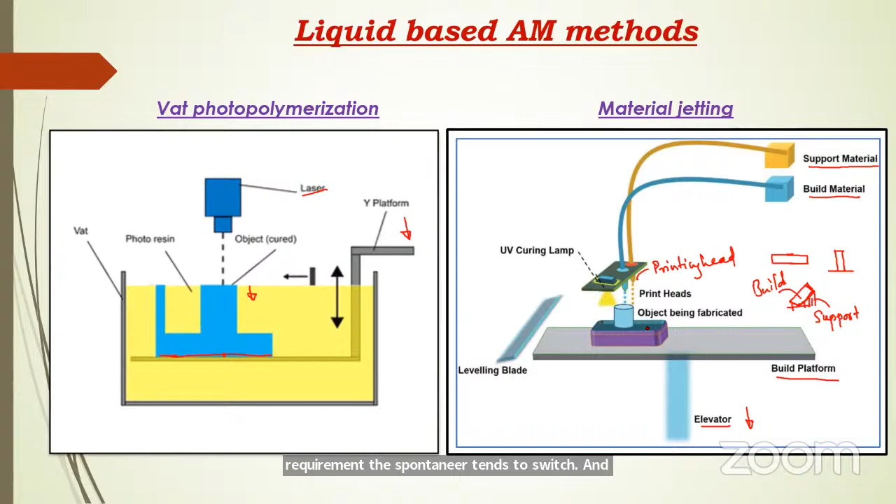So for this we have two types of heads. One supplies the support material, and the other supplies the build material. Both materials are sent through what we call the printing head, and depending upon the requirement, the printing head switches and supplies the build material as well as the support material, and the object is cured. This is material jetting.

Another process is photopolymerization. This is where liquid polymers that react to UV radiation tend to cure and form a solid. This reaction is called photopolymerization, and the material used is called photopolymers. It is mainly used in coating as well as printing industries.

Stereolithography was the first type of photopolymerization process, built by Charles Hull.

Now we talk about how the liquid is converted into solid. You can see monomers here, and photoinitiators in the photopolymer resin. When these monomers and photoinitiators are subjected to UV light, free radicals are formed, which initiate a chain reaction between the monomers and photoinitiator. The chain propagates further due to continuous supply of UV light, and terminates when all the monomers and photopolymers are chained, thus creating a solid part. This is the chemical process that happens behind photopolymerization.

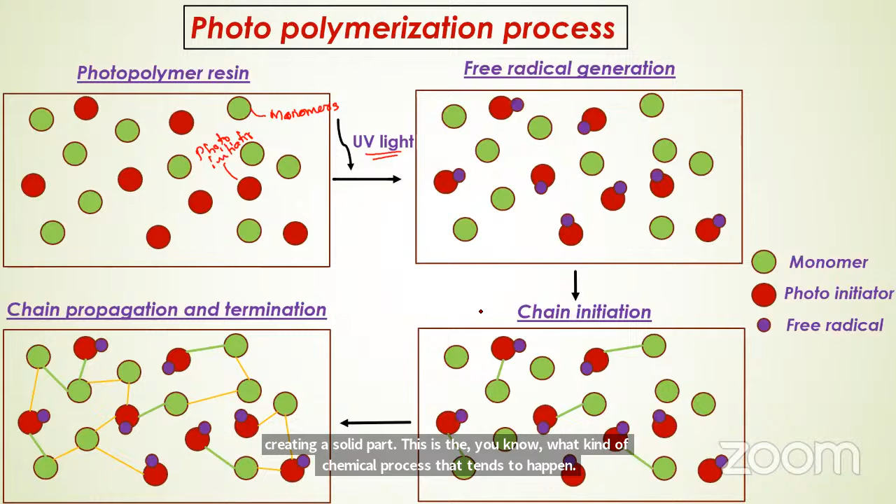On average, for every 2 photons created by the UV laser, 1 radical is produced, and that radical can polymerize over 1000 monomers. Once all chain initiation completes, the polymerization process terminates by three types of processes: recombination, disproportionation, and occlusion. Recombination occurs when 2 polymer chains merge by 2 radicals. A single radical is enough to polymerize over 1000 monomers, and when 2 radicals come into contact, the polymerization process terminates.

Another process is disproportionation. This involves cancellation of one radical by another without joining, and occlusion occurs due to limited momentum. When there is no free flow of this radical, the polymerization process automatically terminates.

Now, looking at the subsystems of liquid additive manufacturing, what components do we use? One is the scanning system. Another is the shape of the UV light used to cure the photopolymer resin. Another is the shape of the liquid used for this particular process.

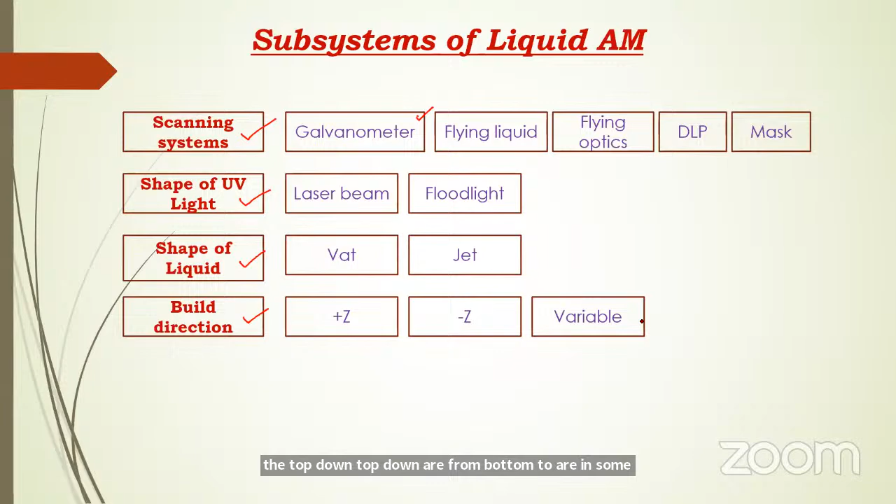If you go for the shape of the UV light, what we use is either a single point laser beam or floodlight. The shape of liquid used in liquid additive manufacturing is either vat or jet. Vat is a single droplet, whereas jet is a continuous droplet over multiple nozzles. The build direction can be top down, bottom to up, or in some cases, if necessary, a variable build direction.

In the galvanometer scanning system, the laser is pointed over a mirror. Depending on the design, the mirror may change its orientation, so the laser beam gets deflected from these mirrors and is pointed through a lens called the F-theta focusing lens. When this pointer falls over the photopolymer resin, it cures the resin. The whole arrangement is called the marking head. Here a single mirror is shown, but the galvanometer consists of many mirrors. This is the process happening in galvanometer scanning.

Now, for flying liquid scanning: there is an XYZ table that can move in all 3 directions. The laser source is placed above and remains constant, it does not move, whereas the XY table moves over the surface. This is what we call the flying liquid scanning system.

Another type is the flying optic scanning system. This is similar to the flying liquid system, but here the XYZ table remains constant with no movement in the Z direction of the build platform, whereas the laser optic moves in the Z direction. That is the main difference between flying optics and flying liquid in liquid additive manufacturing systems.

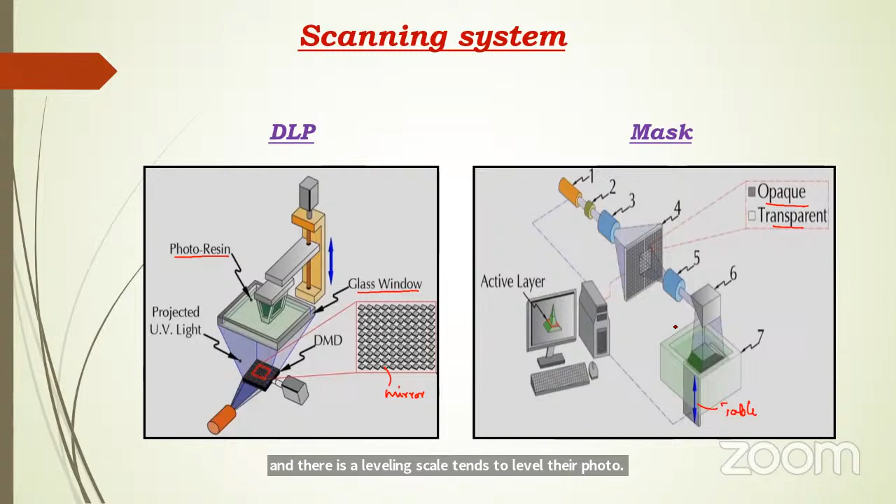Once the layer is built, the table moves down, allowing the photopolymer resin to flow over the cured area, and a leveling blade levels the photopolymer resin over this cured area. Thus the component is formed in liquid additive manufacturing, in the case of DLP and masking systems.

So if you talk about the shape of the UV light used, two types of light are used: one is laser beam, another is floodlight, depending on the nanometer or micrometer scale being used. In the case of laser beam, a single point cures a particular spot, whereas floodlight supplies a beam of light over the surface of the photoresin to cure it. And for the shape of the liquid used, one is vat, another is jetting.

You can see the vat is filled over a particular tub, and the laser is pointed over the required area, and the photopolymer resin is cured, and the object is formed. In case of jet printing, there are multiple nozzles, and we can go for different colors through these nozzles. It tends to go like a shower and fill that particular area. Again, the laser beam, or floodlight, is passed over this photopolymer resin, and it is cured in case of jetting.

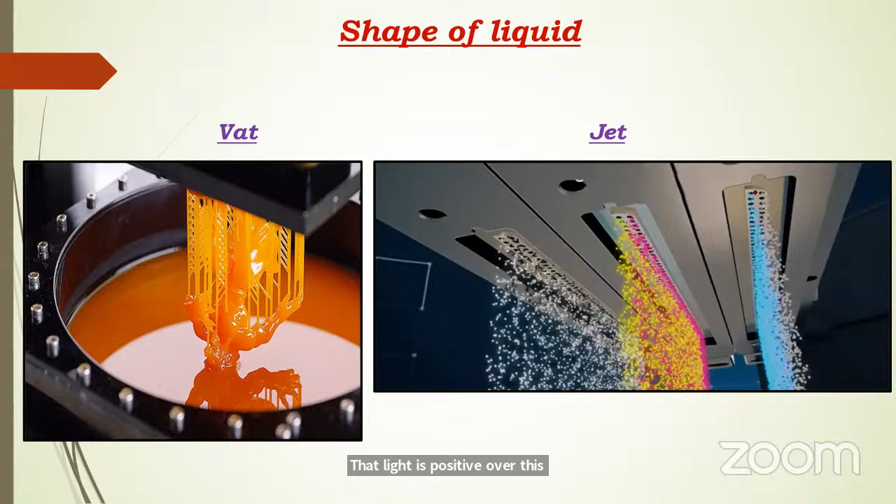So we talk about SLA, DLP, and LCD. What is the difference between SLA, DLP, and LCD? This is also known as resin 3D printing. There are three main 3D printing technologies: SLA, DLP, and LCD. All three use a light source. In stereolithography, we use UV lasers as a light source to selectively cure the photopolymer resin. In digital light processing, we use a digital projector, where the UV light source cures a complete layer of resin at once. In liquid crystal display printing, we use an LCD display module to project a specific light pattern over the resin area, and it cures.

Now we can watch a small video regarding the difference between SLA, DLP, and LCD printing. I will share this.

Just a minute. Just a minute, sir, I'll share it. I can't go to look for it.

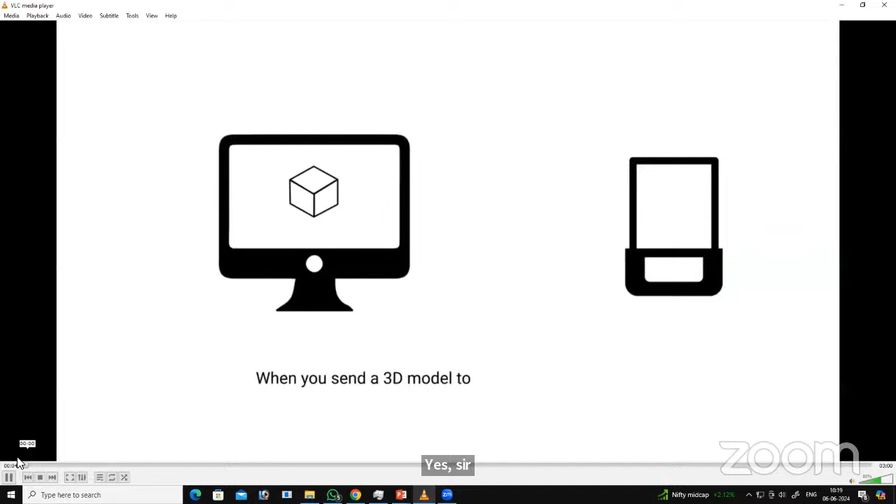DLP, laser, and LCD are the three main technologies used for desktop 3D printing. Are you able to use the audio, sir? Yeah, yes, sir, perfect, sir.

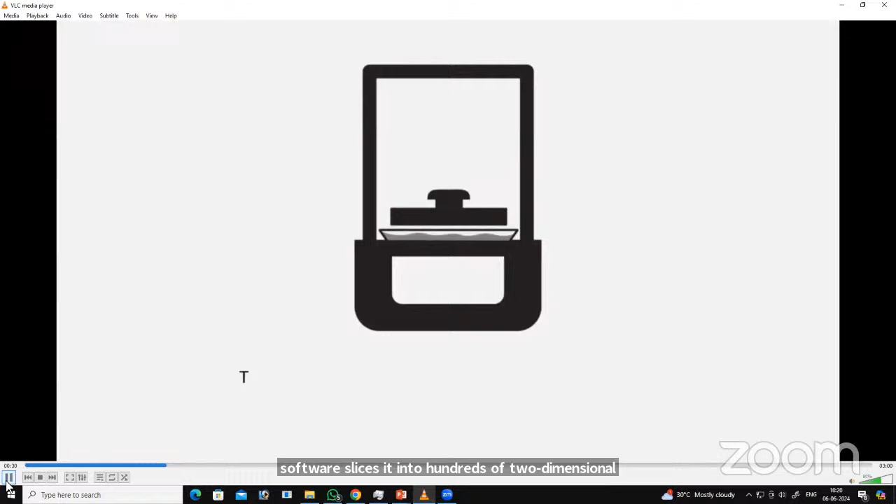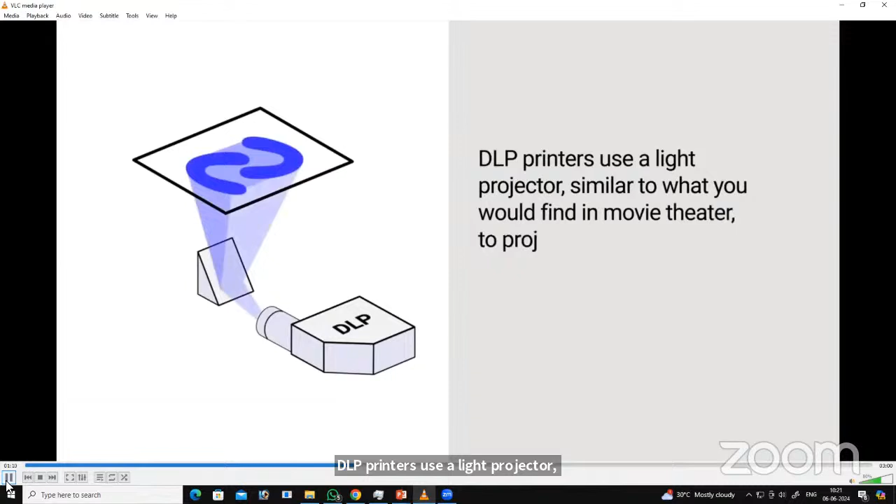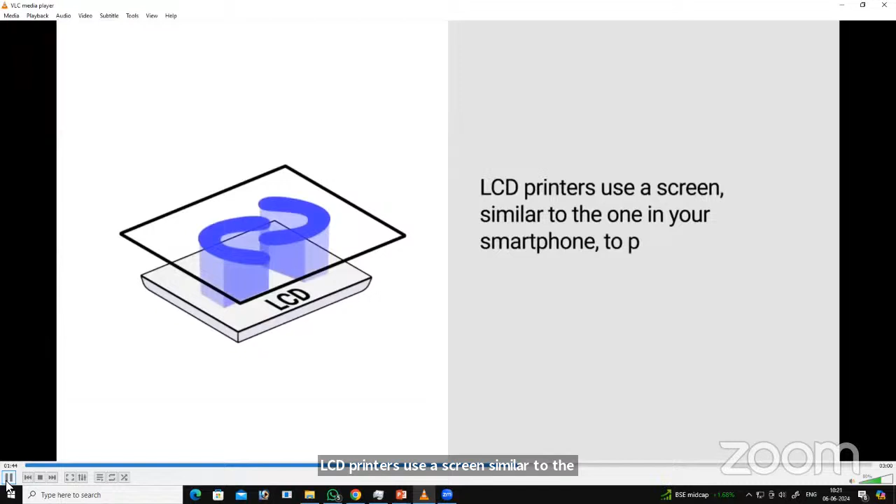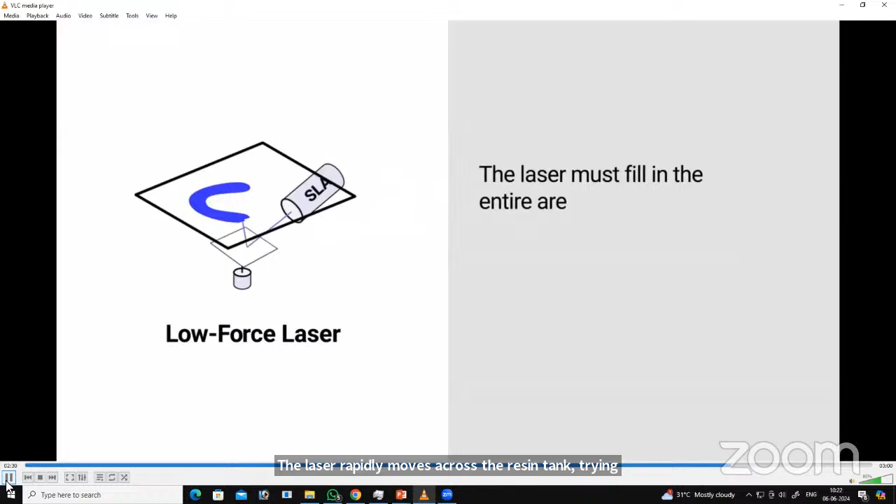In dentistry, to understand how they work, we need to know something about how 3D printers see 3D models. When you send a 3D model to your printer, the software slices it into hundreds of two-dimensional layers. Your printer sees a print as hundreds or thousands of image layers that it will print one on top of the other until the model is complete. The chemistry of 3D printing resins means each printed layer sticks to the build platform but not to the resin tank. Once a layer is complete, the build platform lifts slightly and a new layer is drawn atop the previous one. This process repeats until the model is completely built. Although DLP, laser, and LCD all follow the same basic process, they differ in how they deliver light to the photopolymer resin, and this divergence makes all the difference. Let's take a closer look. DLP printers use a light projector, similar to one in a movie theater, to project the image of an entire layer simultaneously, regardless of the number of parts. Because they cure a full layer in a single flash, DLP printers can be outstandingly fast. They are also very reliable, with low complexity and no moving parts. SprintRay Pro is powered by a DLP projector of our own design, enabling it to 3D print models quickly and with outstanding accuracy. LCD printers use a screen, similar to one on a smartphone, to project the image of an entire layer at once. In this way, LCD printers are quite similar to DLP; they can even share materials. But LCD panels have a few key drawbacks: the light used to cure resin is damaging to the organic compounds in LCD screens, so most LCD printers treat their light source as a consumable, requiring frequent, costly replacement. Laser printers use a pin dot of high-intensity light to draw each layer, similar to using a fine-tipped pencil to draw on paper. The laser rapidly moves across the resin tank, drawing the details of each layer as it goes. It must fill in the entire area with a pin dot of light, which limits the printer's speed, especially when printing multiple parts at once. DLP, laser, and LCD printers are all used in dentistry, but the speed, simplicity, and durability of DLP has made it the first choice of dental professionals all over the world.

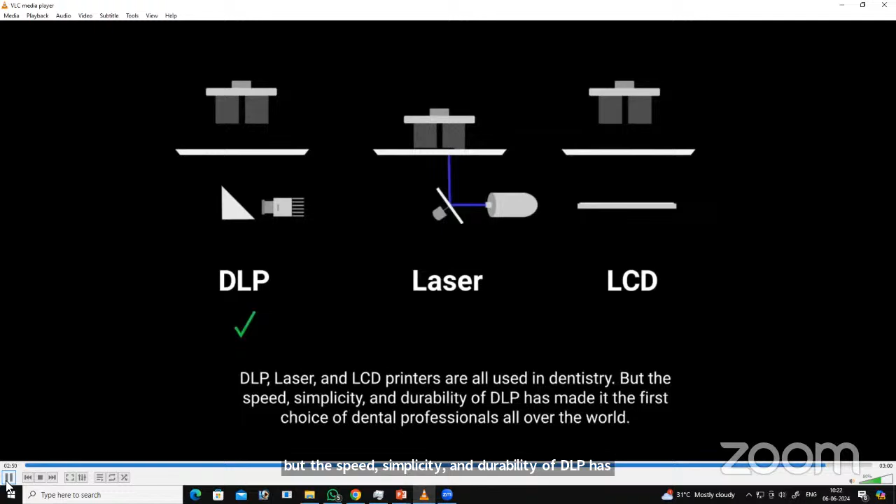So this is the main difference between SLA, DLP, as well as LCD. In case of faster curing, we go for DLP, whereas in case of accuracy, we go for stereolithography.

So we talk about stereolithography - writing with light. It was patented in 1986 by Hull, and it was the first 3D printing technology. It is widely used and most popular in case of resin type printing technology.

This process is very accurate, isotropic, as well as watertight, and the components obtained through this process have a finer surface finish. It creates objects by selectively curing photopolymer resin using a UV laser beam. The material used in SLA is photosensitive thermoset polymer, which comes in liquid form, and when cured, it forms into a solid.

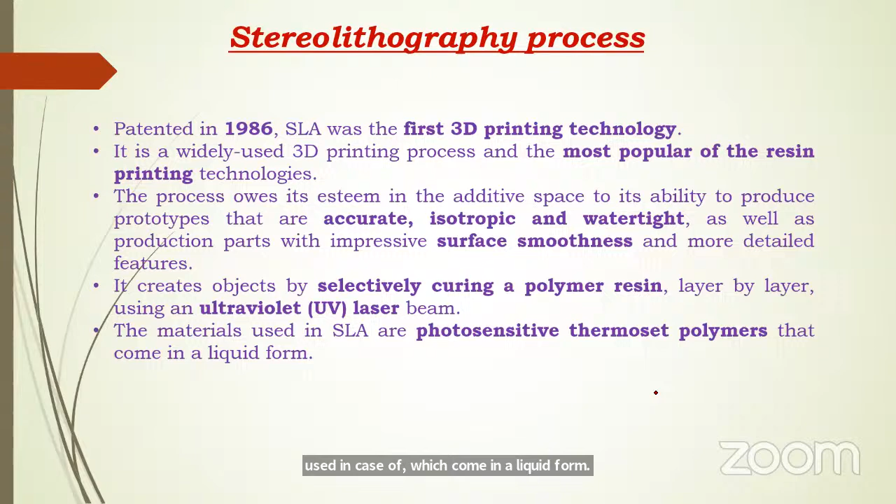So what are all the subsystems in case of SLA? Here SLA tends to use the galvanometer, and the type of light which SLA uses is a laser beam with the wet liquid, and the build direction in case of SLA is negative Z direction.

This diagram shows the stereolithography process. This is what we call the printed part, and this becomes the galvanometer. The light tends to emit from this laser source. This galvanometer has tiny mirrors which direct the laser light to the required area through this XY scanning mirror, which tilts in different directions depending upon the requirement.

There is a leveler which levels this resin over the print platform, and the laser cures the required area. Once it cures the required area, it moves in the Z direction, allowing the resin to flow over the cured part, and the next layer builds. Fine layer thickness can be controlled using this stereolithography process.

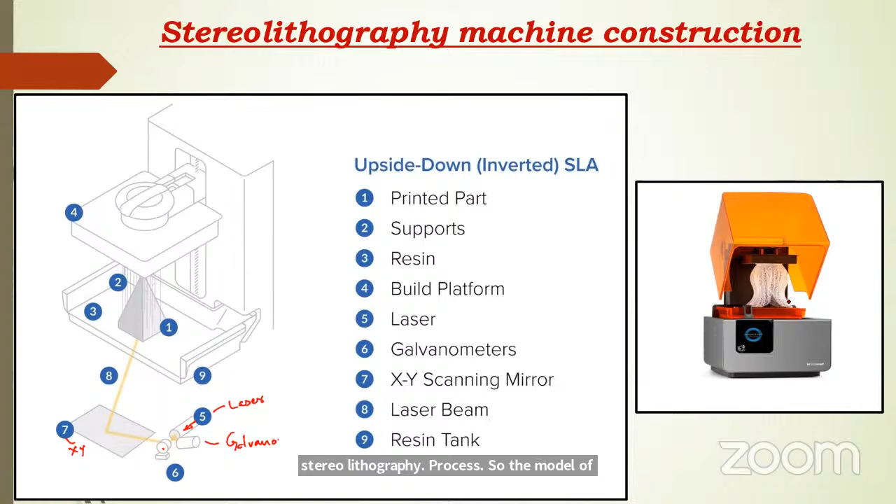So the model of the build material is shown in this diagram. The working principle is very well known - it positions the build platform in the tank of liquid photopolymer depending upon the layer thickness. A UV laser tends to cure the selectively curing area and solidify the photopolymer resin.

The laser beam is focused through tiny mirrors present in the galvanometer. The whole cross-sectional area of the model is scanned so that the produced part is fully solid. This galvanometer moves here and there, and according to that, the part is cured.

During solidification, the monomer carbon chains that compose the liquid resin are activated by means of this UV laser, and the resin becomes solid, creating a strong unbreakable bond between the monomers and the photoinitiators through these radicals. After printing, the part is not in a fully cured state, so it requires further post-processing under UV light if very high mechanical strength is required. The photopolymerization process is irreversible, and there is no way to convert the SLA part back to its liquid form.

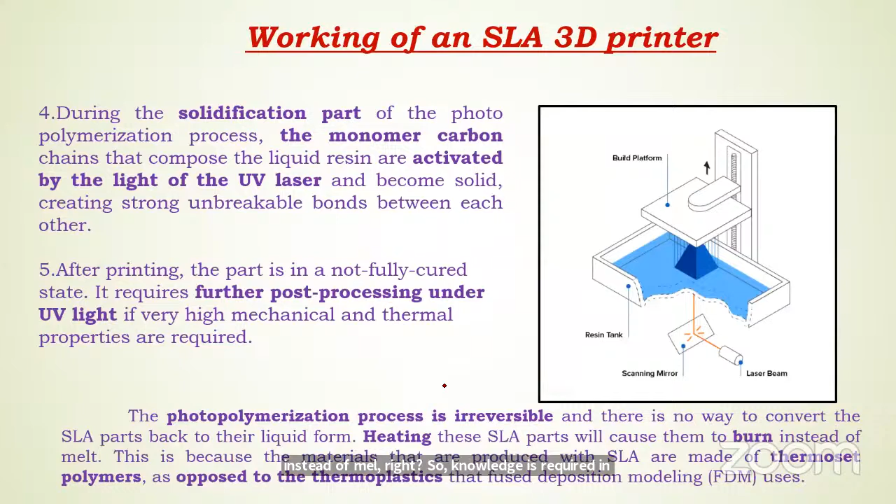Heating these SLA parts will cause them to burn instead of melt, right? So proper post-processing knowledge is required in case of these SLA printed 3D parts.

So the types of SLA are based upon the machine setup. There are two types: top-down printers and bottom-up printers. In top-down printers, the laser source is placed above the tank and the part is built facing upwards. Whereas in bottom-up printers, the laser source is placed under the resin tank, and there is a transparent part under the tank, so the part is built upside down.

So the tank has a transparent bottom with a silicone coating, and this silicone coating lets the light source fall into the resin so that the part is cured. Once the part is cured, it has to be peeled from the build platform - this is what we call the peeling step, a post-processing step.

The bottom-up orientation is mainly used in what we call desktop printers. Formlabs tends to use these types of printers.

Bottom-up SLA printers are easier to manufacture and operate, but their build size is limited. We can't go for large sizes with bottom-up SLA printers because the force applied on the part during the peeling step might cause the print to fail.

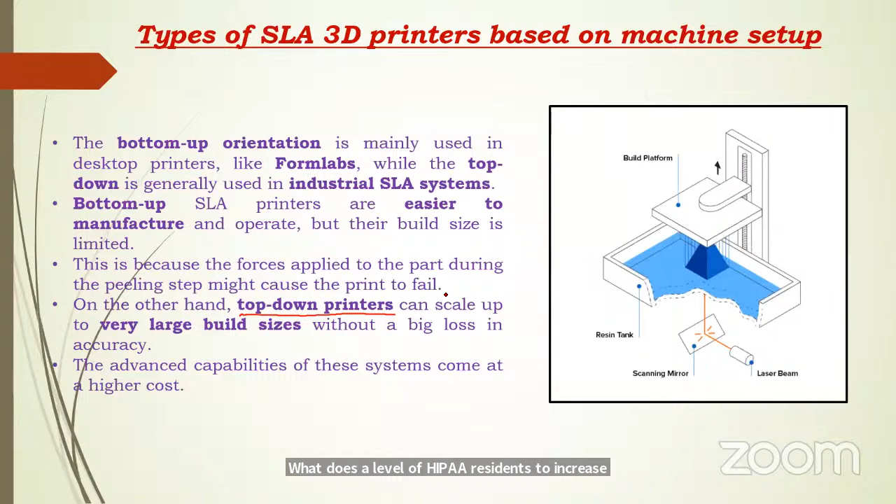The advanced capabilities of these systems come at a higher cost. Once the level of accuracy tends to increase, automatically the cost of the machine also tends to increase. So we can compare the advantages.

In case of bottom-up, it is lower cost and widely available. But in case of top-down assembly, we can build very large size prototypes with faster build times.

If you go for disadvantages, bottom-up has small build size, small material range, and requires more post-processing because support is provided in case of this bottom-up type.

Whereas in case of top-down, the cost is somewhat higher, and a specialist operator is required. Changing the material involves emptying the old tank and pouring the newer material into it.

Popular SLA printer manufacturers are Formlabs for bottom-up, and 3D Systems for top-down. The build size is given, and typical layer height plays a vital role: we can obtain 25 to 100 micrometer layers in bottom-up, whereas 1500 x 750 x 500 build size with 25 to 150 micrometer layers can be obtained in top-down assembly.

High accuracy can be obtained in case of top-down assembly, up to plus or minus 0.1% of the layer thickness.

Regarding materials, in SLA we use liquid resins, which can be chosen based upon the end use of the part. According to the usage, we can select the resins. The price of the resin tends to vary from $50 per liter to $400 per liter, depending upon the quality of the material. Industrial systems offer a wider range of materials than desktop SLA printers.

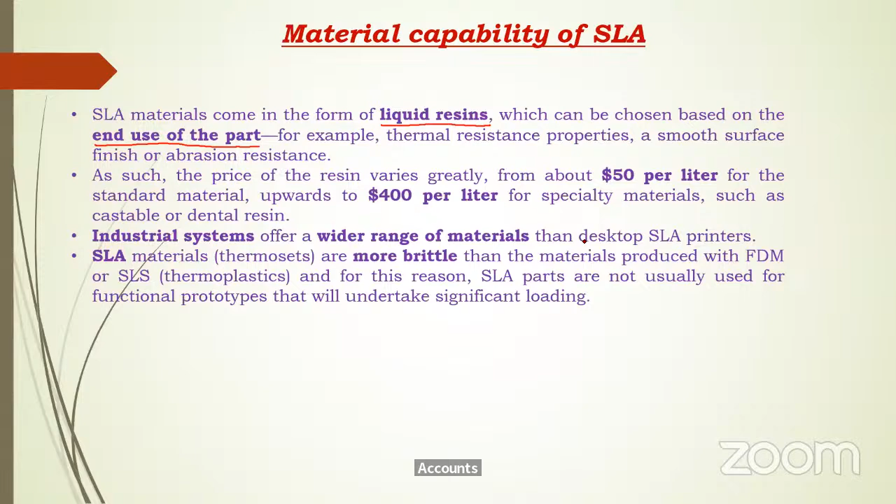Some common materials used in SLA are standard resins, high detail resin, clear resin, castable resin, tough or durable resin, high temperature resin, dental resin, and flexible resin. The characteristics of these resins are given here.

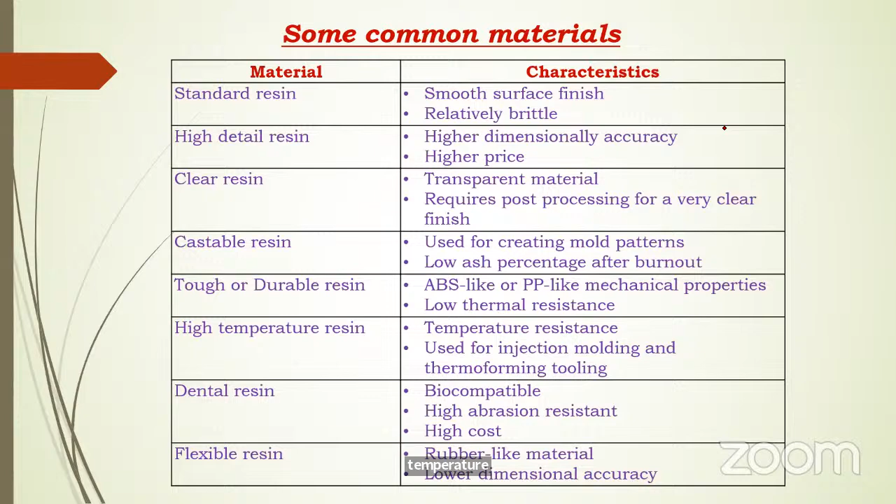What are the printing parameters to be considered in SLA 3D printing? First comes the layer height, which is the exact height of each cured layer required. It affects not only the speed of printing but also the quality of curing. The number of layers required to create the object determines the printing speed and time.

The next printing parameter is exposure time: how long the surface is exposed to the laser light or UV light. Light power and curing exposure time play a vital role in the quality of 3D printing. Exposure time is the amount of time the resin is exposed to the laser light or UV curing light. The default is around 6 seconds for most resins.

If you want enough strength, the exposure time is increased. An increase in exposure time helps if the raft won't stick to the build plate — generally, the longer the bottom exposure time, the more tightly the raft will stick. Then we have to go for peeling the component from the build platform.

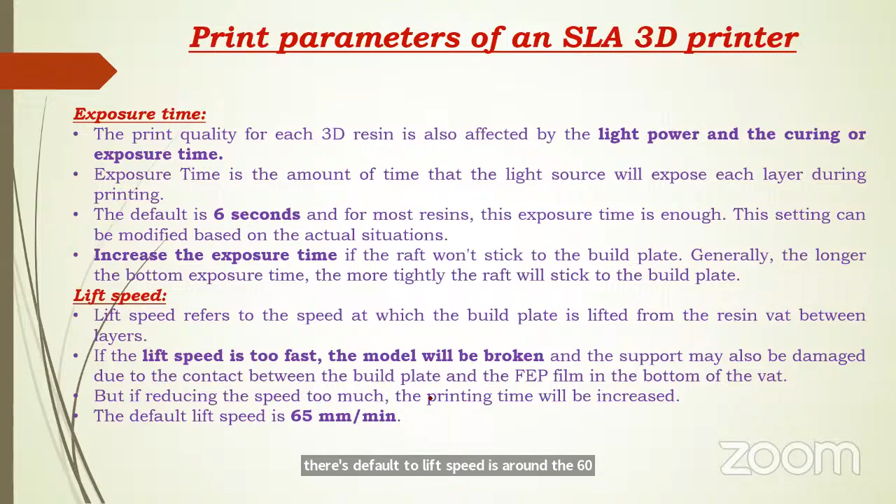Touch points are areas of contact where scaffolding meets the model. Not providing your model with enough support can cause misaligned layers, partially curing resins, and the model to detach from the support. Once it cures thoroughly, this raft tends to cure and stick over the build platform, and removing this plays a vital role. Thin walls fuse to wrap the model, forming a pancake on the bottom of the resin tank. Careful selection of the support structure plays a vital role in case of SLA 3D printer.

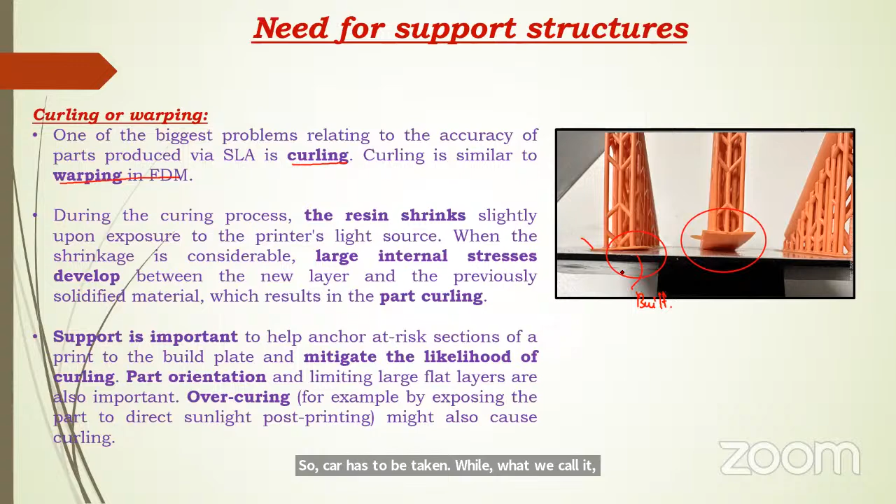Support is very important to help anchor at-risk sections, and part orientation and limiting large flat layers are also very important. On over-curing, for example, we try to come away from the build platform, so care has to be taken while designing the layer thickness that is required for the first layer to be sticky over the build platform.

So we talk about the design procedures that have to be followed in case of SLA. Minimum supported wall thickness is required. The recommended minimum wall thickness is 0.4 mm. If it goes beyond, less than 0.4 mm, the wall will break. A supported wall smaller than 0.4 mm may warp during the peeling process. So we have to maintain a minimum wall thickness of 0.4 mm while using SLA.

Minimum unsupported wall thickness recommended is 0.6 mm. An unsupported wall is one connected to other walls on fewer than 2 sides. If it is smaller than 0.6 mm, it may warp or detach from the model during printing. So we have to maintain a minimum wall thickness of 0.6 mm if you want to avoid warping of that particular wall.

Maximum unsupported overhanging length should be 1 mm. If it goes beyond that, the structure won't be built as per design. So overhanging plays a vital role in case of SLA, and the inclination level will be a minimum of 19 degrees from the level. If it goes beyond that, we can still build, but the support structure is very much required. So printing flat surfaces at an angle plays a vital role in case of SLA.

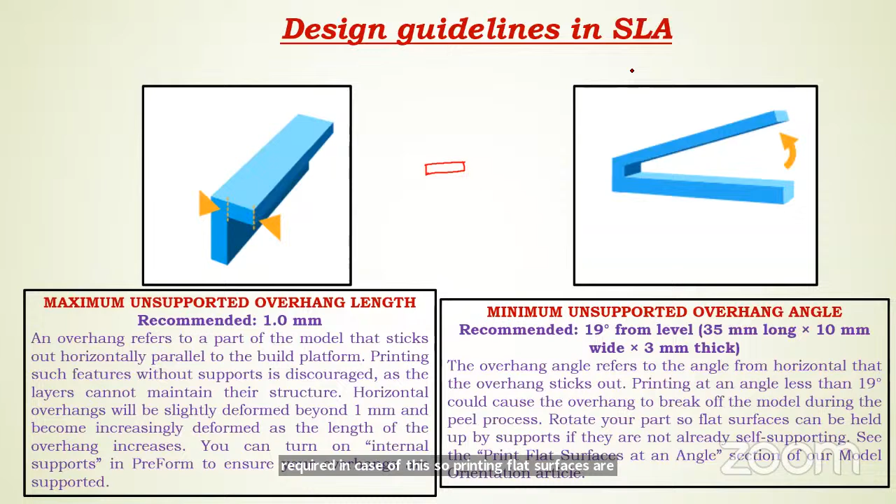Another design guideline: the maximum horizontal support that is required, recommended, is 21 mm. If it goes beyond, deflection from the support happens. If it exceeds, we get a surface like this, a part that won't be straight.

That is what we call the problem in case of SLA. So we have to maintain a maximum of 21 mm. The minimum vertical wire diameter in case of SLA is 0.3 mm. If it goes beyond this, it will warp. For a height of 7 mm tall, and 1.5 mm for a height of 30 mm tall. So if it is less than this, it tends to warp like this. We can't be able to build a straight vertical wire diameter in case of SLA.

So what is the minimum embossed part that can be built in case of SLA? It is a width of 0.1 mm. That is the minimum embossed. If it goes beyond that, we can't be able to build it.

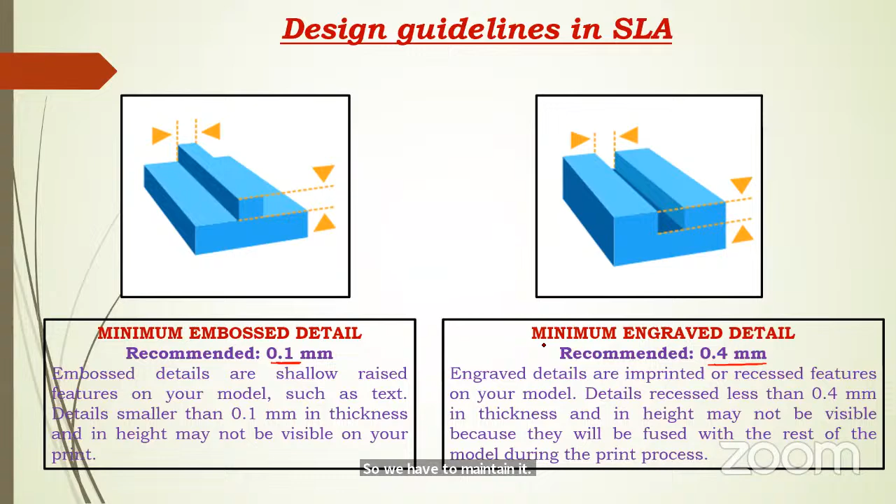So the minimum engraved part that we can build in case of SLA is going to be 0.4 mm. We have to maintain a 0.4 mm engrave. If it is less than that, we can't be able to build it, because one material tends to flow over another material in case of this engrave.

The minimum clearance recommended in case of SLA is 0.5. If it is less than that, the two resins tend to stick together. So the minimum hole diameter recommended in case of SLA is 0.5 mm. We can't be able to build a part with a hole less than 0.5 mm in case of SLA.

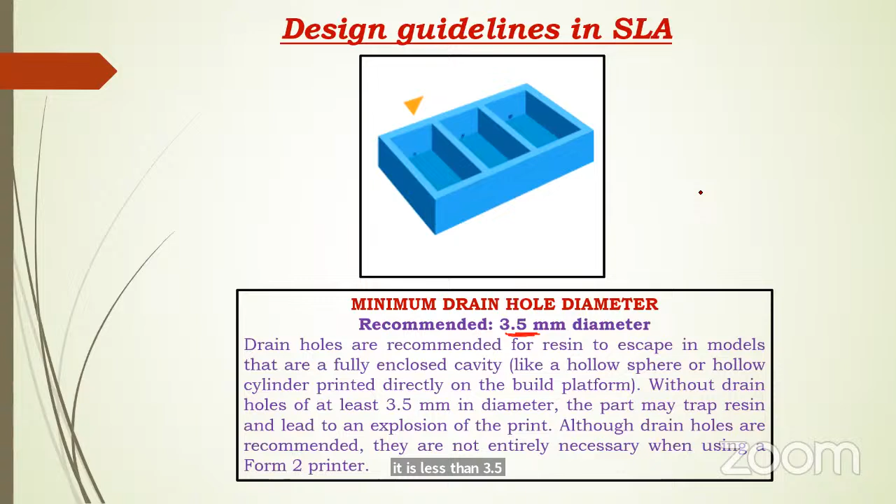The minimum drain hole, you can see here the drain hole, is 3.5 mm. If it is less than 3.5 mm, the hole will automatically close due to the UV curing.

How this SLA is used, we can see through these case studies. A bladder device has been printed using SLA for drug delivery, for treating diseases in the bladder which include interstitial cystitis, bladder pain, and bladder cancer. Existing treatments include oral medication, transdermal patches, and intravesical instillations. Here you can see a bladder device built through SLA. This bladder has been built as hollow, with no medicine filled into it.

Here you can see 10% drug loaded, so the difference can be seen here. This is by means of a hollow bladder device. The 3D printed solid bladder device has a 10% loaded device, and this is a 50% loaded device. These types of devices for medical treatment can be built through this SLA printing process. The 3D printing material used here is elastic resin from Formlabs. In this case, the material used is again elastic resin from Formlabs, plus lidocaine hydrochloride monohydrate, which is used to cure the disease in the bladder.

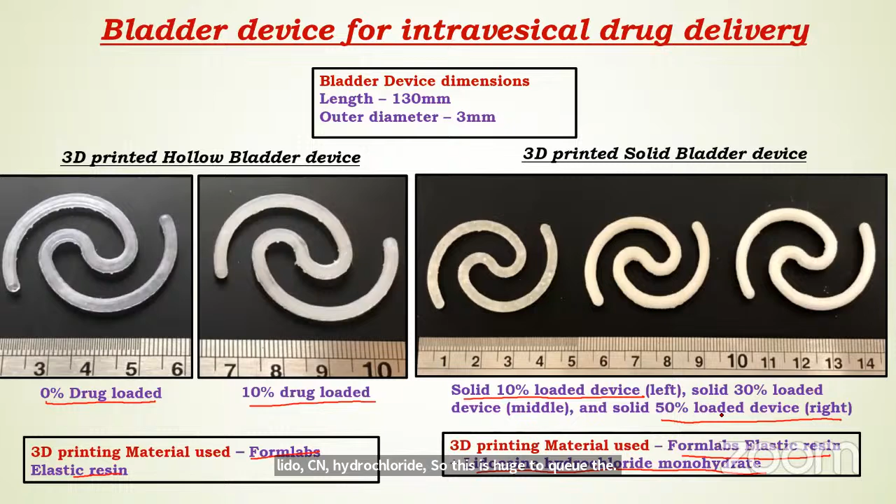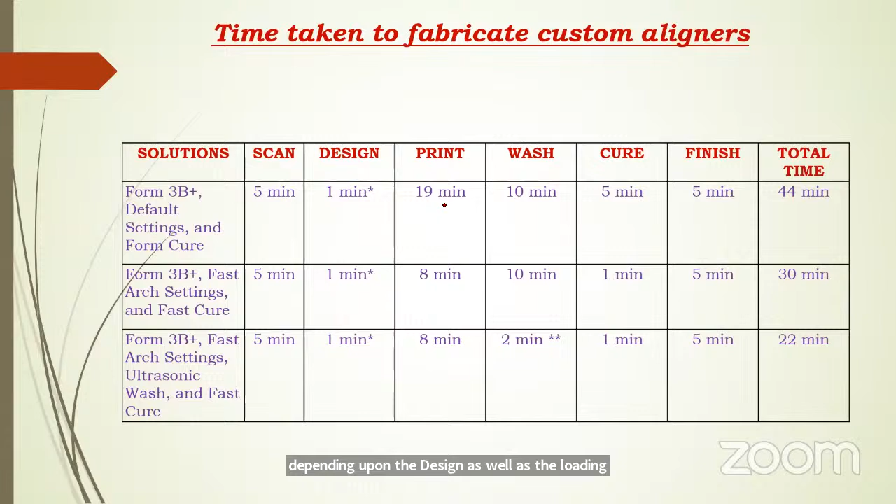Another case study is this: the time taken for custom teeth aligners. Depending on the type of curing, the scan time is 5 minutes, and the design time is around 1 minute. The printing, depending on the design as well as the loading, is 19 minutes. So the total time is around 45 minutes in case of Form 3B Plus default setting and Form Cure. The time tends to vary depending on the various curing settings as well as printing settings.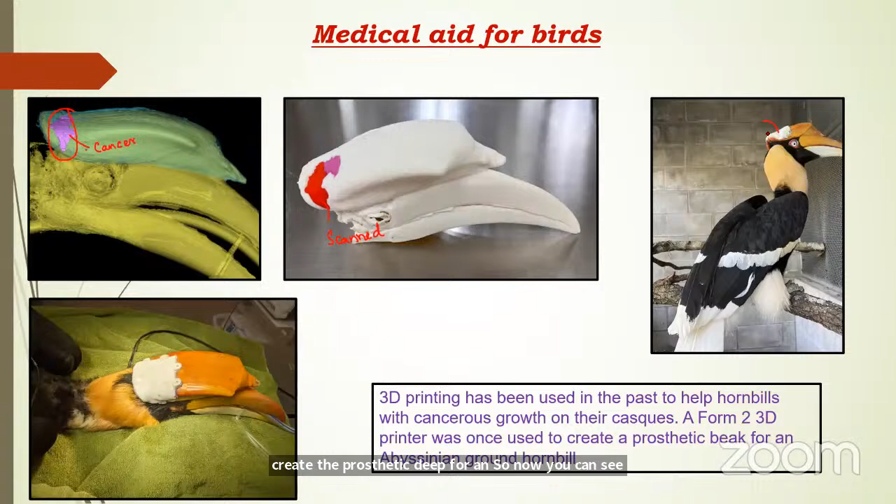We can protect our ears using this muffler. For that we can scan, and according to our ear we can print the mufflers using this 3D printing. Some selected products can also be printed using this 3D printing.

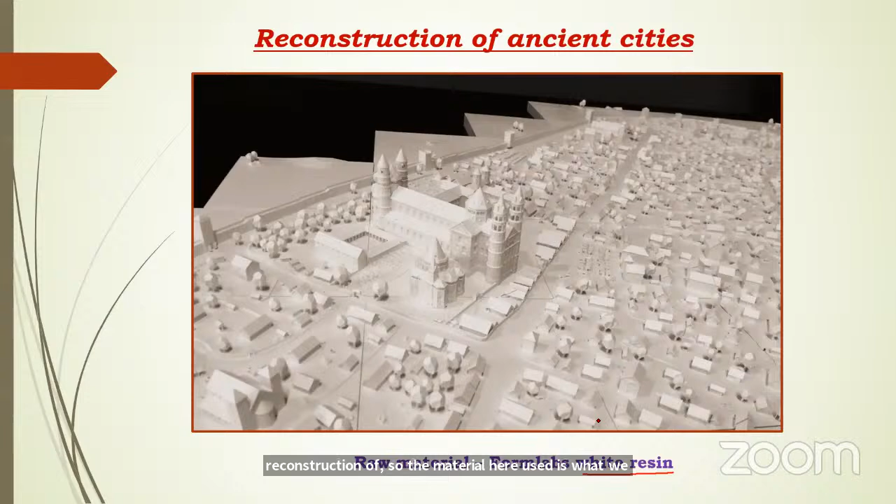We can reconstruct some monuments. This picture shows the reconstruction of ancient cities. The material used here is what we call white resins from Formlabs. By this we can create some monuments also.

Some 3D parts have been created. You can see this shoe has been created by means of triple cell technology. Different flexible materials, the same material with different densities, can be used to print. This is what we call the flexible area, and this bottom portion is what we call the harder area. Here we can build the part using different materials with different densities.

Here you can design and visualize how the parts will be accordingly. The support structure can be designed and printed.

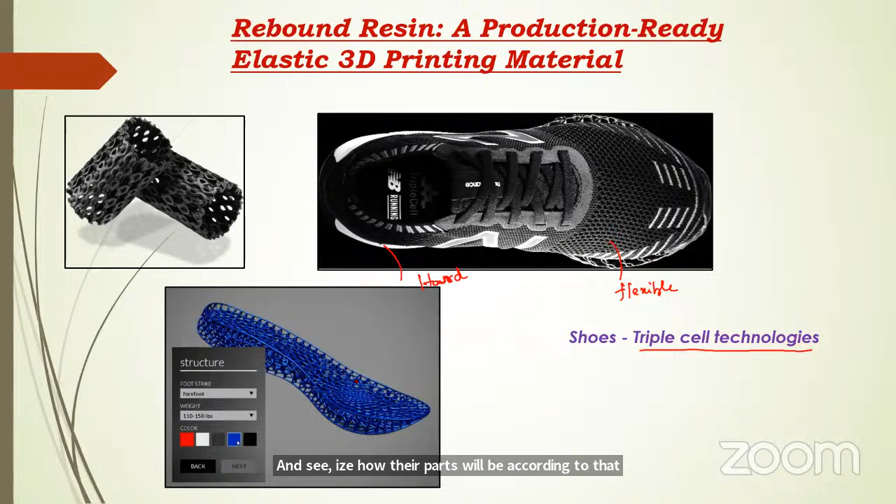We can also recreate existing pieces. Different color resins can be used and printed. The accuracy of the printing mainly depends upon the thickness of this particular layer. Some criminal investigations can also be done through this SLA.

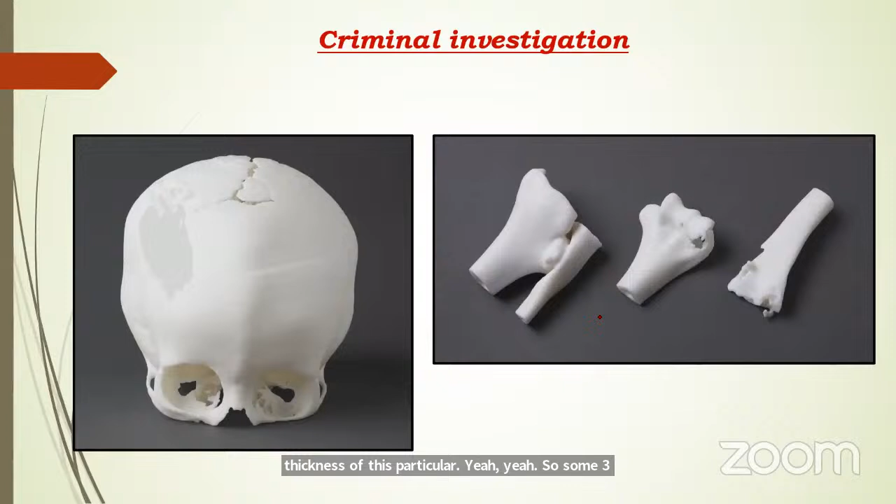Once the part has been printed, you can see here. The Ohio State University partnered with local law enforcement to investigate a decomposed woman's body near the town of Dayton. First they tried to scan the decomposed body and face. Then using these 3D techniques, they used different facial reconstruction techniques to predict the face of that particular dead body, and it was a woman's body. From this they found out whose body had decayed. So this SLA mainly helps in case of investigation purposes also.

So we talk about digital light processing. What are the subsystems for DLP? We have the scanning system, DLP, and the floodlight, and the liquid used here is VAT, in the negative Z direction. Here also we use photopolymer resin to print, but through a floodlight we cure the part and form the prototypes. It is very similar to SLA, except it cures the entire layer at once.

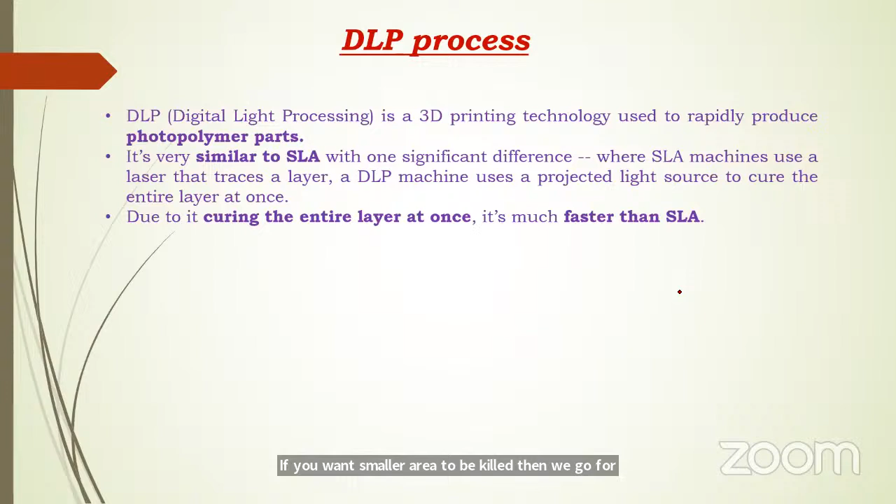So what is the construction of a DLP 3D printer? You can see here the light source tends to fall over the resin. The resin gets cured. Again, the build platform tends to move either in minus Z direction or plus Z direction. And there is a sweeper which tends to fill the photopolymer resin over the cured layer, and again the curing tends to occur.

So this digital light source uses what we call micro devices, where it can be tilted depending upon the requirement. You can see the build platform. There comes the light and tends to deviate from this micro mirror, and we can tilt the micro mirror up to 10 to 17 degrees so that we can create different prototypes.

So how does SLA print? Once we require this, it tends to start curing the first circle, then the second circle, then the third circle, and at last all 4 circles are cured.

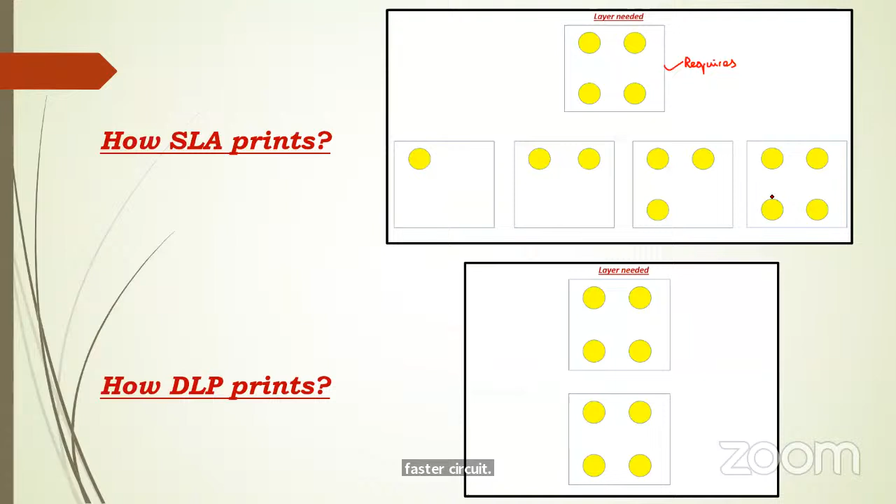But in case of DLP, since we are using a floodlight, it tends to cure the whole area at a time, so we can get faster products with these DLP printers. So the DLP advantage is, time taken to print one cylinder is equal to time taken to print 25 cylinders, since at a time we can print all of them. These intermediate portions are what we call masks from the layer, so this curing area is controlled by means of transparent masks.

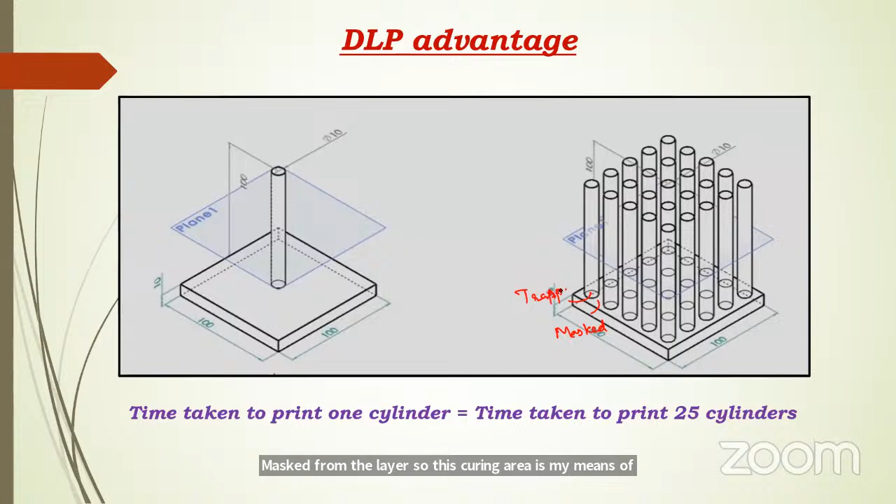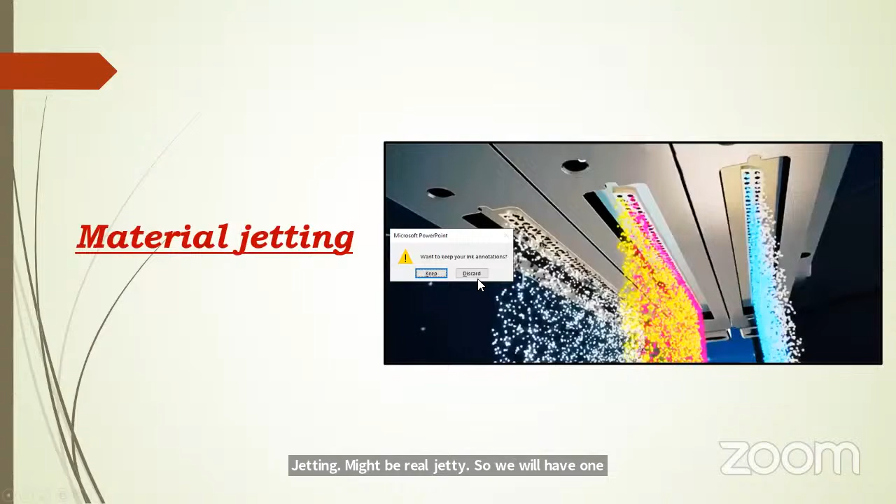So multicolor printing and multi-material printing can be done in case of this material jetting. We will have one video regarding this Polyjet technology.

Polyjet is a layer additive manufacturing technology used to develop plastic prototypes from 3D CAD data. This rapid prototyping process uses inkjet technology combined with UV curable materials to quickly and economically produce highly detailed and accurate physical prototypes. Polyjet is one of the fastest prototyping processes available to develop high-precision physical parts and is ideal for smaller parts, appearance models, and master patterns.

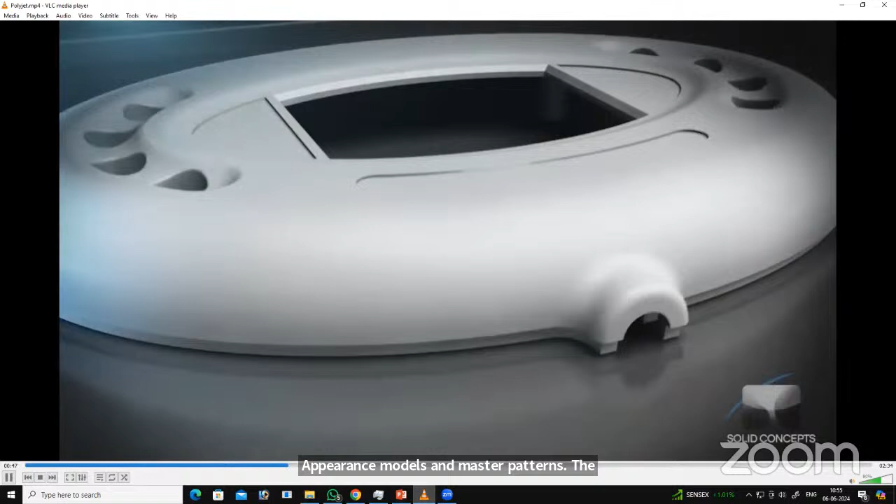The Polyjet process begins by slicing CAD data into cross-sections or layers as thin as 6/10,000ths of an inch. The data is then transferred to the Polyjet machine, which begins constructing the object one layer at a time.

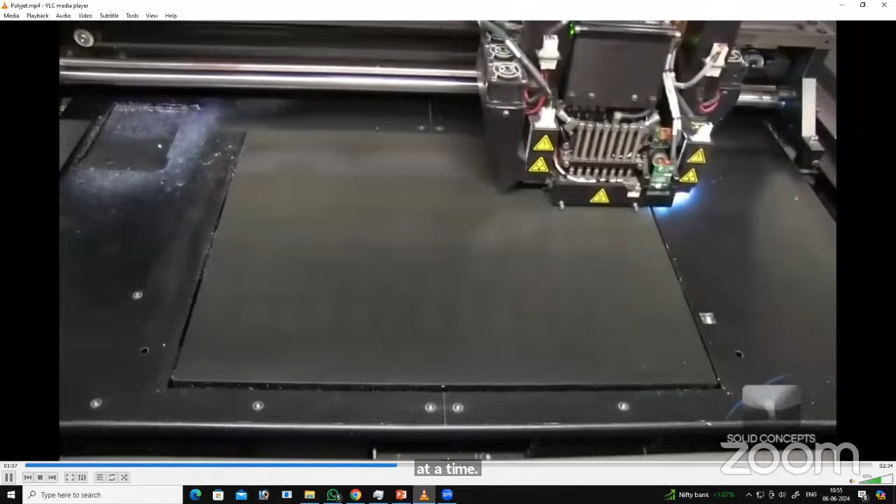Similar to how an inkjet printer lays down pigment, the Polyjet printhead deposits small amounts of ultraviolet curable material on the build platform, eventually forming a single cross-section of the part. An ultraviolet light attached to the printhead simultaneously cures the material as it is printed. Once a cross-section is complete, the build platform is lowered slightly to make room for the next layer. As the part is built, support material is added to give supplemental strength to fine structures and down-facing surfaces.

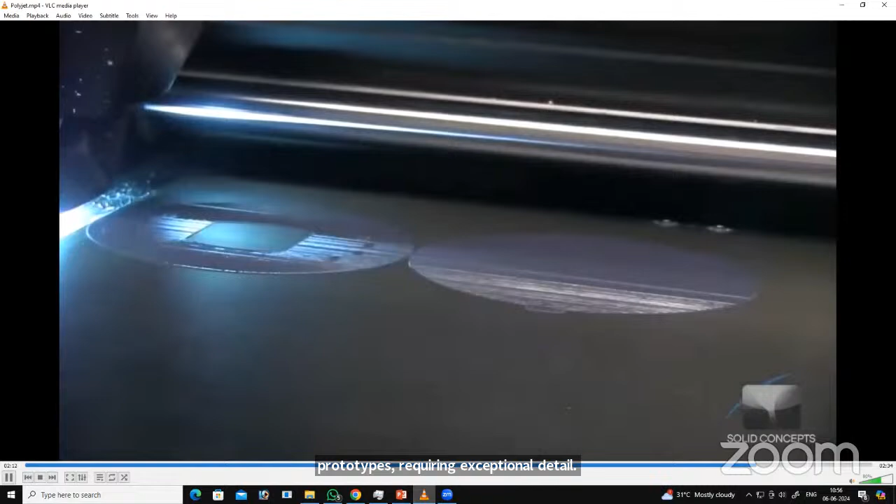After all of the layers have been created, the finished part is removed from the platform and cleaned. Although finishing is not necessary, a number of hand sanding and paint options are available through service providers such as Solid Concepts. Polyjet parts are well suited for quick, economical prototypes requiring exceptional detail, surface finish, and edge visualization. Polyjet is ideal for a wide range of industries, including medical, entertainment, consumer products, automotive, and industrial design.

So we will continue here. So we talked about material jetting.

Sir, can you hear me? Yes, sir. Hello, no problem. Hello sir, yes sir, this is Pawan sir, I have one question. Yes sir.

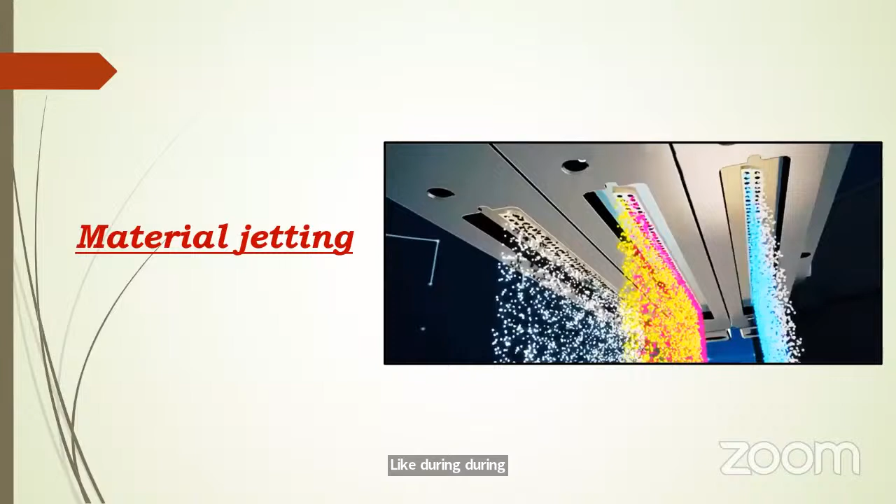Sir, actually suppose we are doing some operation in a human body and suddenly we get some fracture in the body and we want to replace some artificial components. So can we manufacture it immediately by additive manufacturing? It is possible, yes sir. Like during operation time we can manufacture it? Yes sir, that is possible in case of this polymer prototype, polymer resin printing, sir.

Okay sir, thank you sir. But in case of metal, it is somewhat very difficult, sir. Okay sir, okay sir, we will continue, sir.

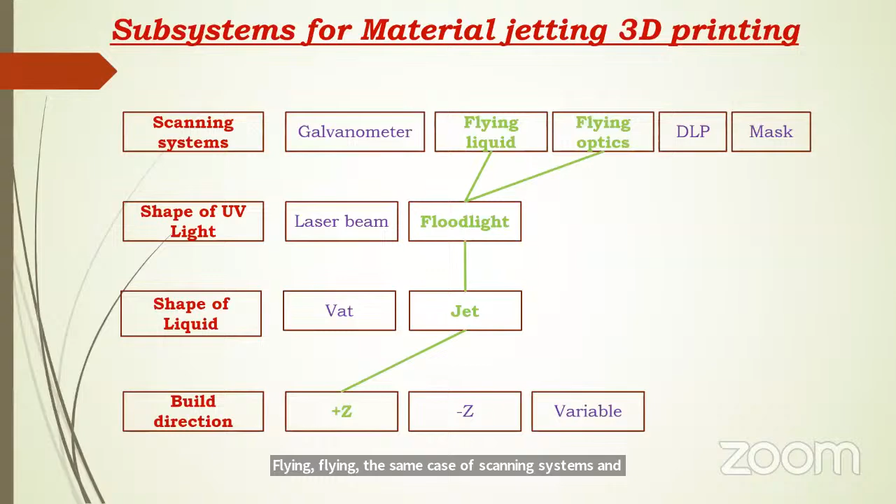It is similar to what we call 2D printers. Here printing is there, and multiple nozzles are built over this printing head. It tends to dispense the photosensitive material through these multi nozzles, and again we are using UV light for curing this part layer by layer. Here we are using thermoset photopolymers, and high dimensional accuracy can be obtained through this multi-jet printing, and multi-material is also possible in case of this multi-jet material printing. For example, for visual prototypes and tool manufacturing, we can use this material jetting 3D printing, MJ 3D printing.

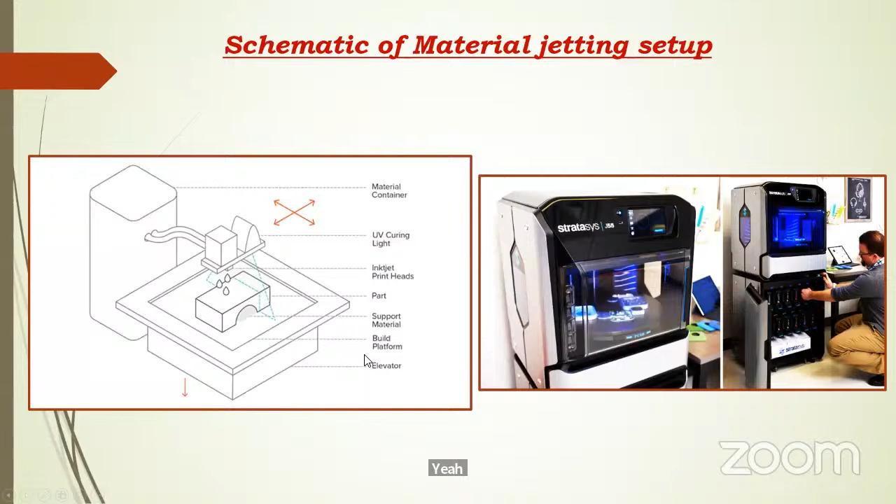So here you can see the schematic diagram of this MJ 3D printing. Stratasys uses this technology for printing particular prototypes. So how does this tend to work?

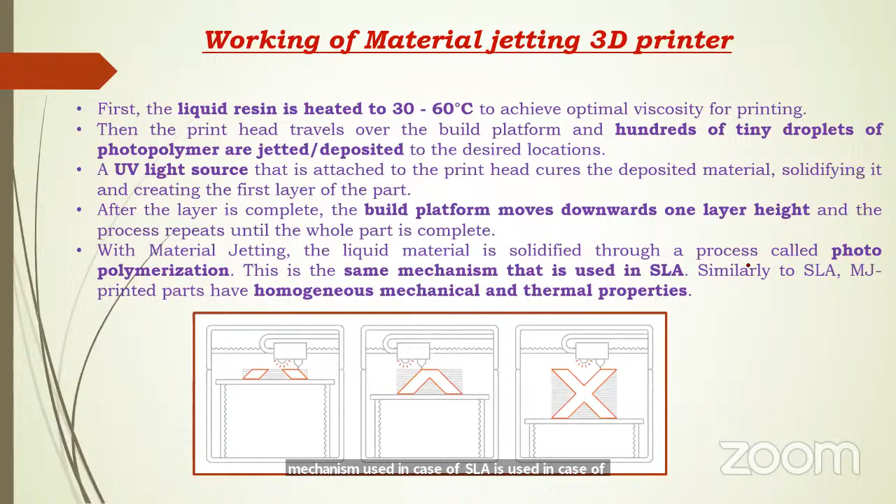The liquid resin is heated up to 30 to 60 degree centigrade, and small droplets are jetted over the desired location. Again, a UV light source is used to cure these small jets, and once the first layer is cured, automatically the build platform tends to move one layer height. Thus the part is created. The same mechanism used in case of SLA is used in case of material jetting, and homogeneous mechanical and thermal properties can be improved in case of this material jetting process.

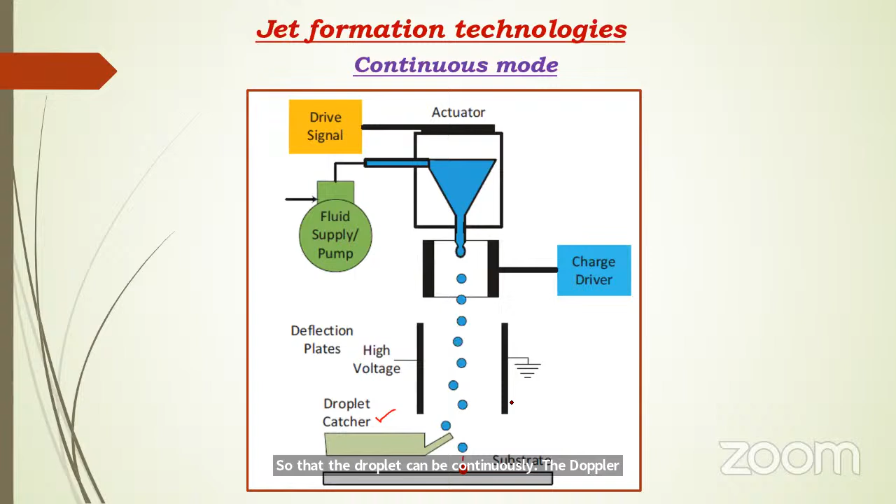If some space is required, or a droplet should not fall on this particular space, we try to use what we call a droplet catcher, so that the droplet cannot be continuously dispersed over this particular substrate. This is what we call continuous mode. If you want to neglect one droplet, you have to provide one droplet catcher.

But in case of drop on demand, the substrate motion tends to move. So depending upon the requirement of the droplet, the drive signal actuates this fluid supply pump, and according to that, the droplet tends to fall over this particular substrate. This is regarding what we call drop on demand mode.

What are all the characteristics required in case of material jetting? The layer height plays a vital role in the accuracy of that particular part. In MJ, all process parameters are preset, so we can't modify them; it is manufacturer based. Even the layer height is linked to each specific material with its own layer height. So complex physics of droplet formation has to be studied before using this material jetting. The typical layer height used in material jetting is around 16 to 32 microns, so accuracy is around plus or minus 0.1% in case of this MJ.

If you want the most accurate 3D printing technology, then we have to go for this material jetting. Warping can occur, but it is not as common as in other technologies. For this reason, very big parts can be printed with material jetting with great accuracy. The build size is approximately 380 x 250 x 200 mm, and as big as we can go up to 1000 x 800 x 500 mm.

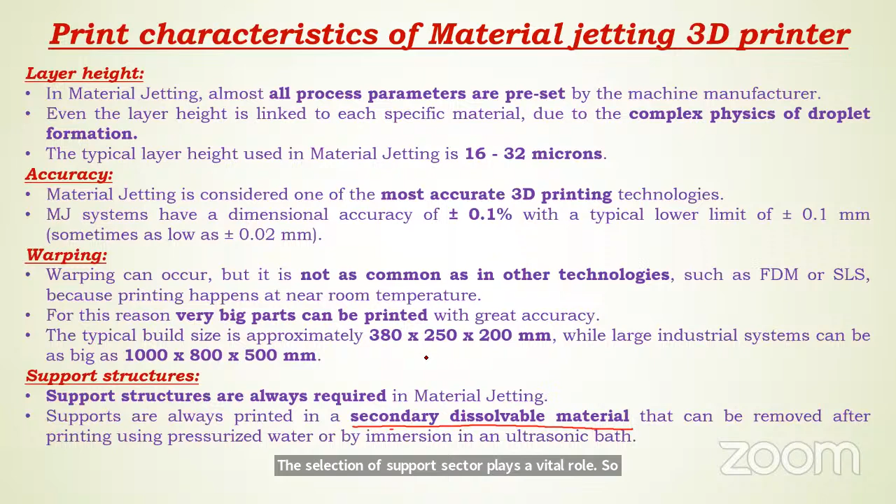Support structures are always required in material jetting, as in case of SLA, and supports are always printed in secondary dissolvable materials. So this part is very important; the selection of support structure plays a vital role. What we select in case of material jetting is dissolvable support structure.

Multi-material can be printed in case of this MJ, and at the build area level, different parts can be printed in different materials and different colors. This is mainly used for practicing certain operations, such as surgery. When performing surgery, we can scan the human part with different colors, and it can be printed with different parts and colors, and operated on before going for the actual surgery.

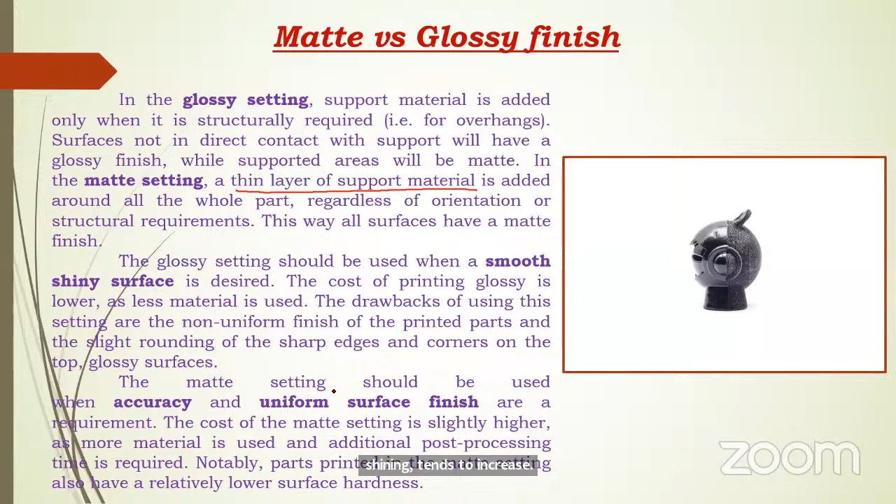Some common materials used in 3D printing are rigid opaque plastics. Standard materials simulate injection molded parts and are brittle in nature. We can also go for flexible materials like rubber, with customizable hardness whenever required.

We talked about a 3D printed shoe, where we can go for these flexible materials. Another material is simulated polypropylene, which we use whenever good flexural strength is required.

Another material used is simulated ABS, where high temperature resistance is required. Another commonly used material is castable, where no ash occurs after burnout, which is why it is selected.

High temperature material is used whenever temperature plays a vital role in that component. Whenever glossy or matte finish are required, we go for transparent material, which gives a glass-like appearance and can be processed to 100% clear, medical grade. Whenever sterilizable requirements exist, we choose this medical grade, biocompatible material, used in dental as well as medical applications.

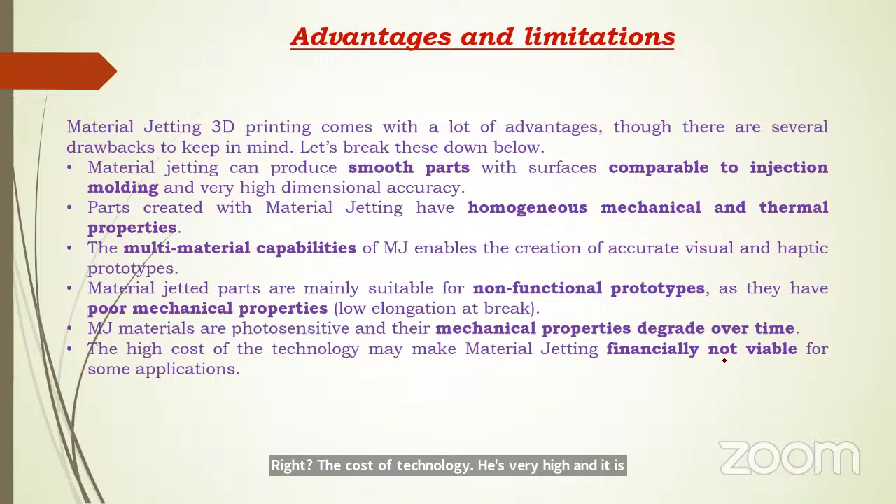A student asks if the multicolor has the same path or a different path. The instructor clarifies this is a single product with different materials, which is why it's called multi-jetting. The bottom portion has a hardened surface, with pore-like structures for flexibility, and there is a different color present, using different materials in the same part.

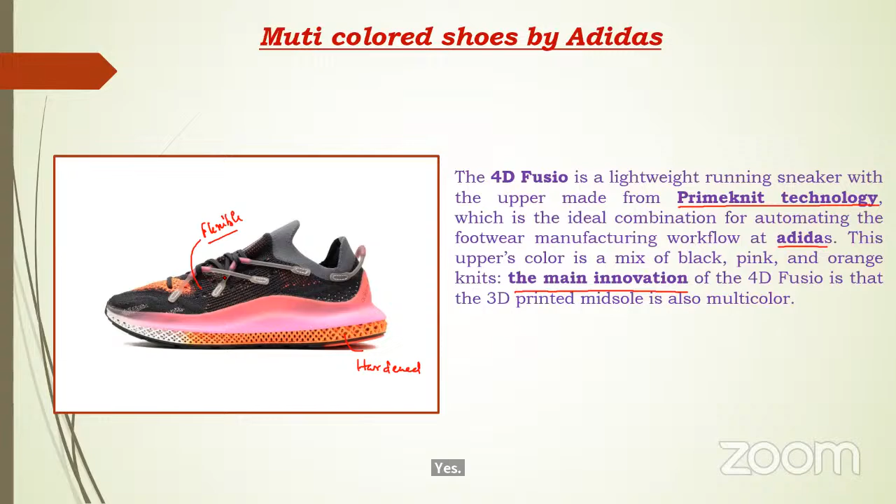Okay, so this, right, so this is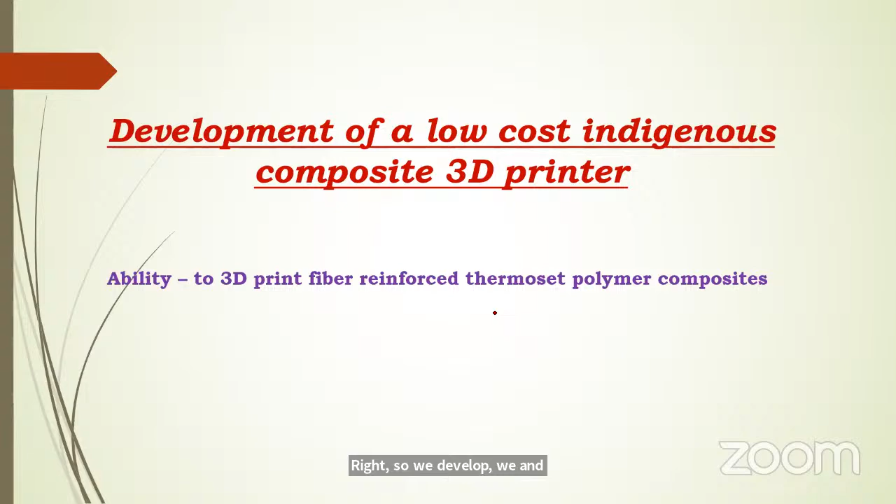So what we did in this liquid additive manufacturing, in MIT we developed a low cost indigenous composite printer. We will talk about that. So the background of our case, we chose additive manufacturing, and we selected the material extrusion technique, and we also selected UV direct ink writing.

So our material extrusion method uses a pinch roller feed system. The filament material comes in here. We try to use ultraviolet light and some reservoir ink, and with this reservoir ink and ultraviolet rays, we try to print the part over this particular surface.

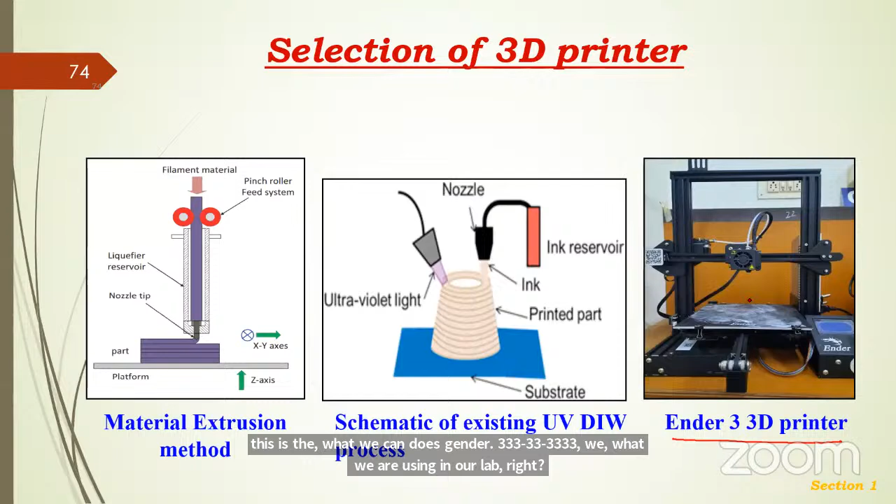This is the Ender 3 3D printer, what we are using in our lab. We tried to convert this Ender 3 3D printer into a photopolymerization printer. So we used a BlueWave 200 Dymax controller, and we are using UV curing, which costs around $2,000. So this is the existing setup, and a laser diode costs around 3,000 to 4,000 rupees. So we tried to replace these two with this laser diode.

So what are all the components we have used in our 3D printer? We selected a motherboard MKS Gen LV1, and we used Ultimaker Cura software for our project, and we used a display MKS Mini 12864 version 3, and we used Marlin firmware for building that particular development.

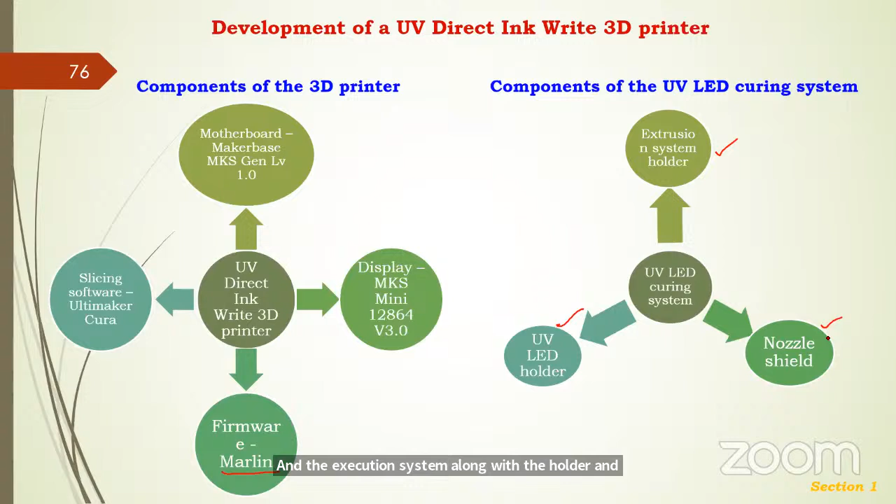So the components of the UV LED curing system: for this, we used the UV LED holder and the extrusion system along with the holder and a nozzle shield to separate the flow of material from the nozzle from the UV light that is exposed over that nozzle. This is the holder system used for holding the extrusion flow. This is the nozzle shield we designed for our product, and this is the UV LED holders.

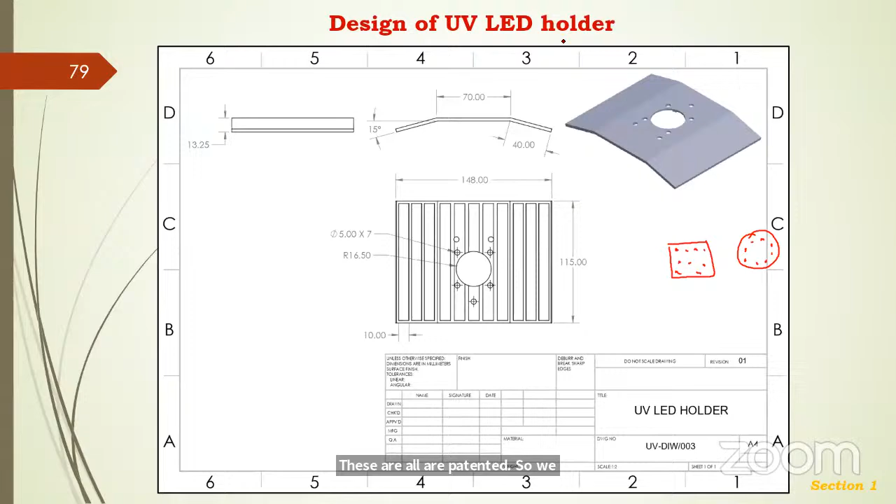Different types are there - one is array type, another one is concentration type. These are all patented. So we tried different components in different arrangements like this. So we designed our own UV LED holder and tried to assemble it.

So this is the assembly of our UV curing system, and we have applied for a patent, IP 2023-410-75654, and it is under process, going to be approved. So this is our setup that we have built.

You can see the build platform, the nozzle holder, the UV light strips, and the nozzle, and a connecting hose. A reservoir comes here from the top. We used a peristaltic pump to supply the ink from the reservoir to the nozzle, and you can see a UV holder here, which supports the UV curing system as well as this particular nozzle.

To control the moving speed of this XYZ table, we used a speed regulator, and to see at how much speed it tends to move, we used a speed display.

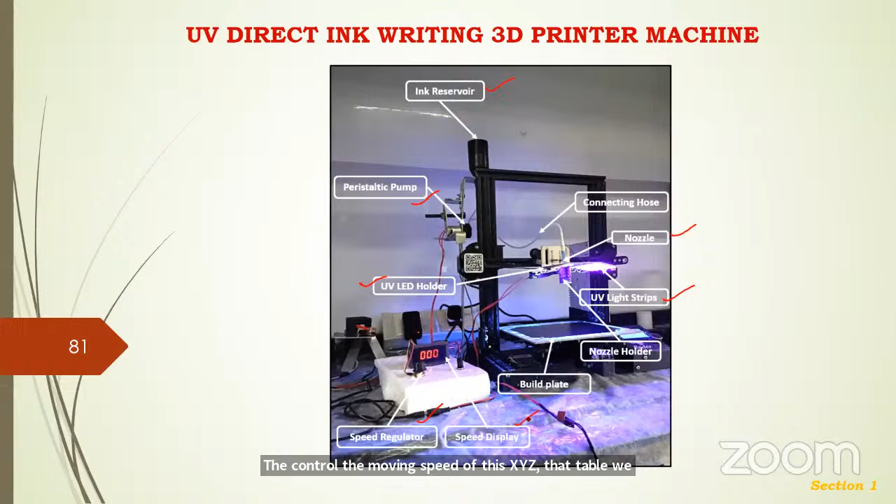We conducted some rheological tests over the printed parts. We kept the Anycubic photopolymer resin quantity constant, and tried to vary the fumed silica weight percentage and also the polyvinylpyrrolidone.

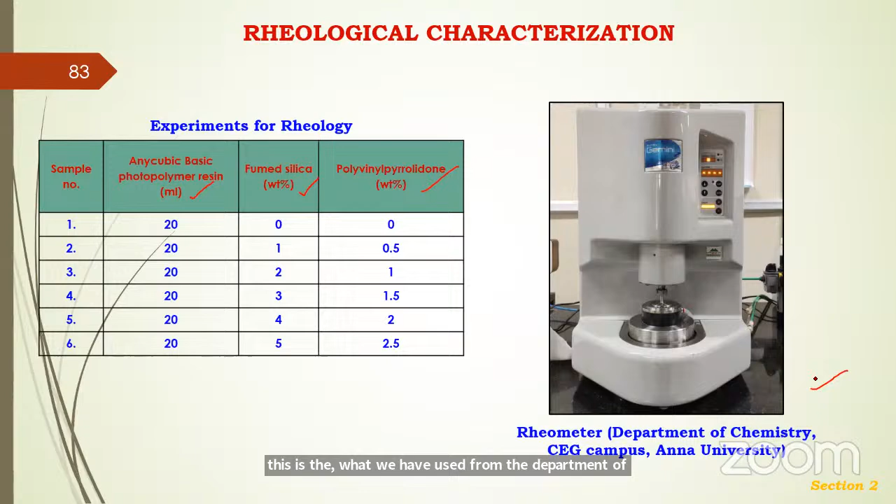We conducted a few experiments using this rheometer from the Department of Chemistry, CEG campus, Anna University, for studying the characteristics of this 3D printing. We went for the flow sweep test and the results have been predicted.

We selected a nozzle with a diameter of around 0.84 mm, and the length of the nozzle is around 35 mm.

Using this particular setup, we maintained a different standoff distance, varied the printing speed, and varied the average layer width. With these two parameters we tried to print different parts.

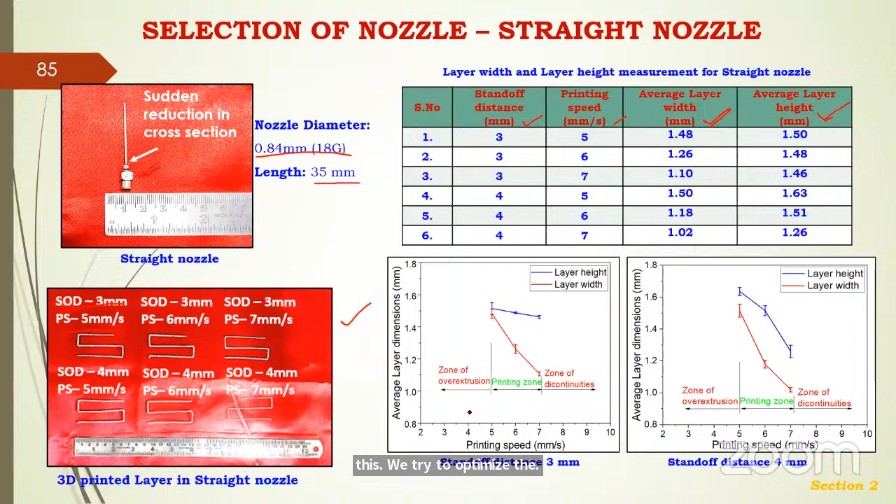From this we tried to optimize the printing speed and the standoff distance, and we also tried to optimize the layer width and the layer thickness.

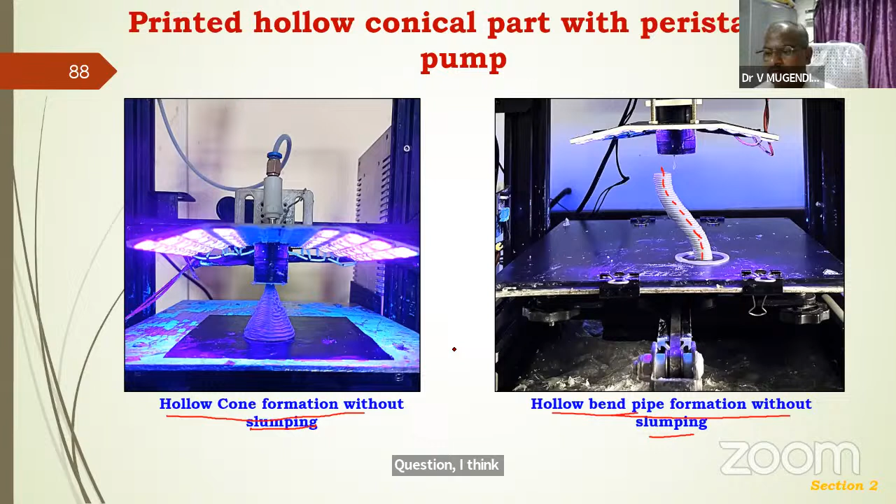Thank you, Professor. Thank you. Thank you for giving me an opportunity. Yes, sir. Thank you very much, sir. Can I close, sir? Yes, sir. Thank you very much, sir.